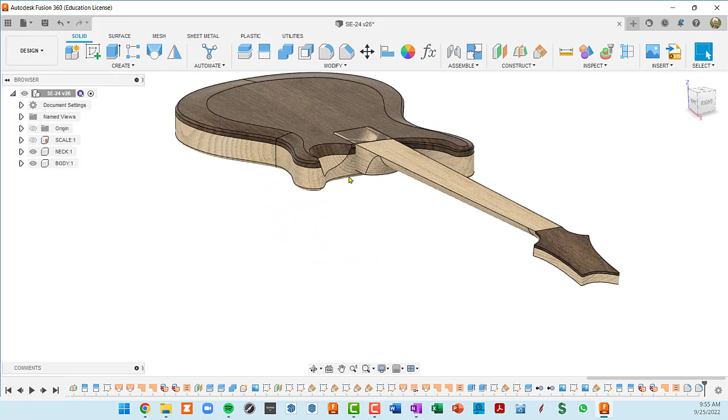In the previous video we did these body cuts, this neck access cut here, and our belly cut on the bottom side. So the final cut in the body will be where the neck joins the body. But before doing so, I noticed one thing on my guitar: the neck is slightly raised above the top of the body, and it's also slightly pitched downhill. So I want to go ahead and do those two fixes before we cut this neck joint.

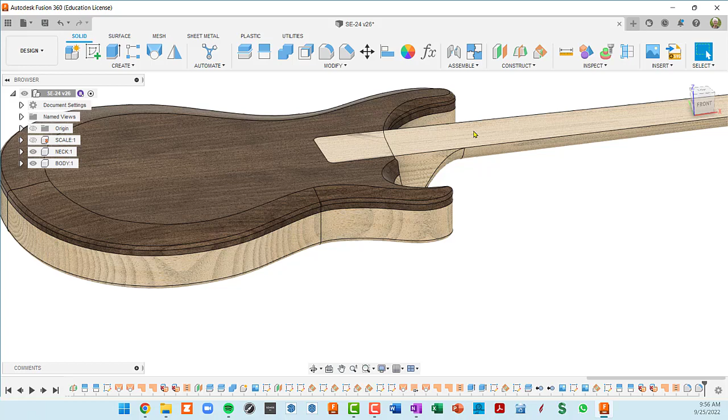The other thing is, since we're going to be angling this neck, and I put the scale in its own component, unless I do the same rotation on that scale, it's not going to be in the same plane as the neck. So I think I'm also going to project the scale onto the neck before we do the rotation. Let's go ahead and do that first.

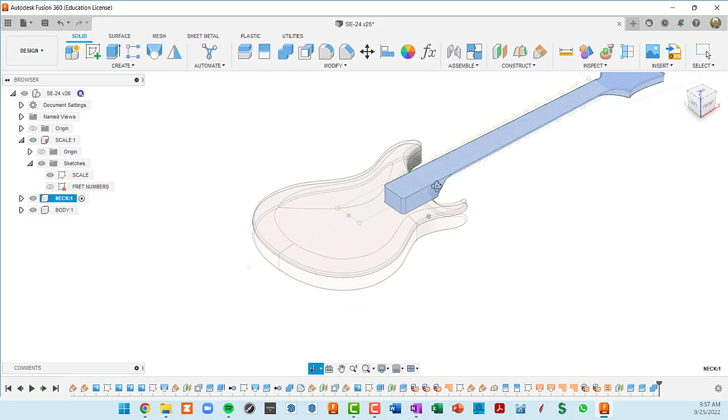I'm going to go to the scale component and make those sketches visible. Basically I want the scale sketch visible. Now I'm going to activate my neck and create a sketch on the top of the neck. So I'll go to create sketch, click on the top of the neck, and now I want to project all of these fret markers, fret lines, into that sketch.

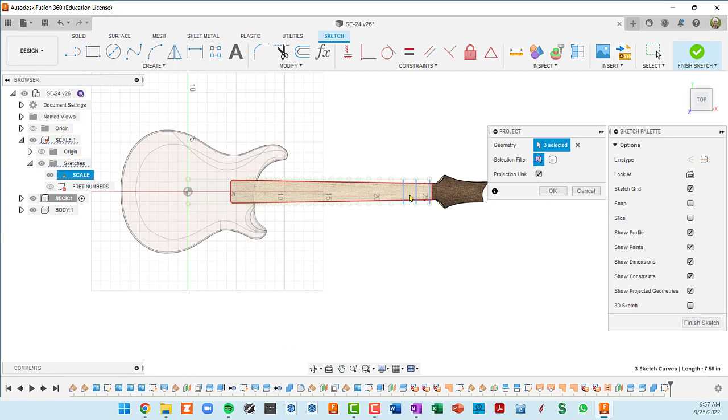So I'll hit P for project, and I'll start clicking on those. One thing that's kind of odd in Fusion is you can't do a surround selection while you're in project. Not quite sure why that is, but that would be a convenient feature to have here. So I've got to be careful and click on all of these fret slots. Let's see if I can do it quickly. I mistakenly clicked on this, so I'm going to control click to unselect it.

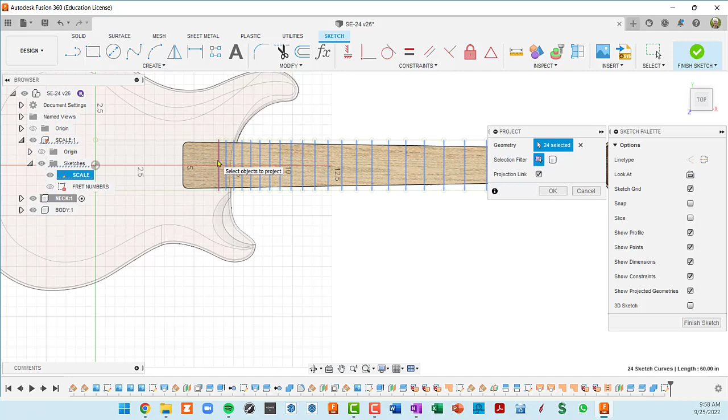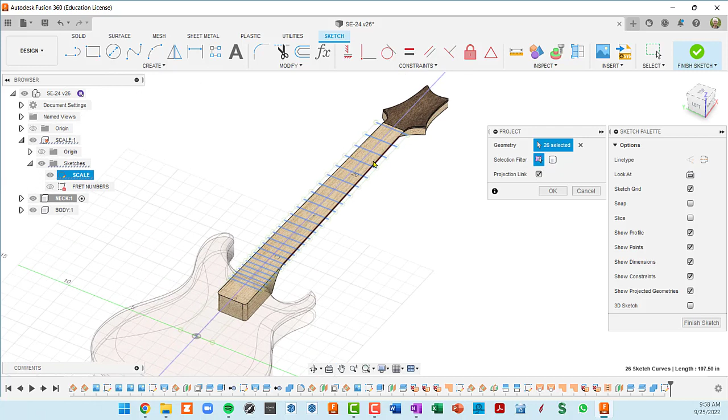Okay, so that I believe is the 24th fret, and we've also got the nut marker here. While I'm in here, I'm going to also get this center line, which may come in handy at some point. So I've got all those fret markers or fret slots selected, and I'm going to finish my project.

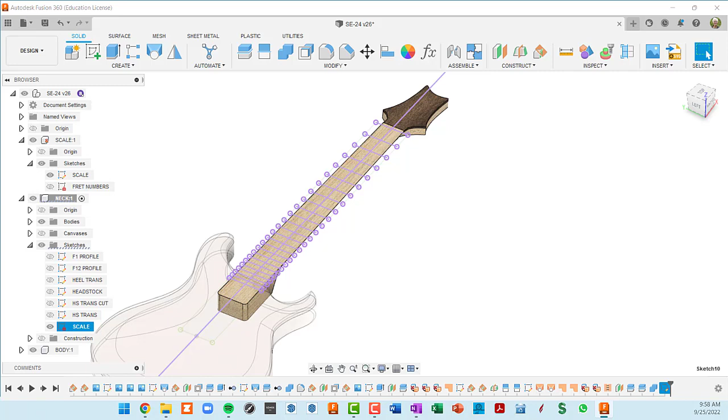Now let's open up the neck, and this is the sketch that I just created. I'm going to finish that sketch and then go ahead and name this scale. Really there's no difference between that and the scale component sketch, but when I rotate the neck, this sketch is going to come along with it.

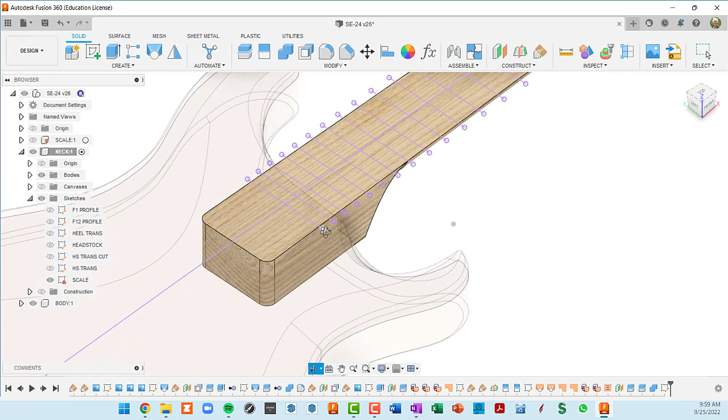I'll hide that scale, and in retrospect I would have put the scale as a sketch inside the neck next time doing this, if the neck needs to be pitched down like this does. Okay, so I want to raise this component up, and then I also want to rotate it down, and I think I want to do the rotation basically where the neck intersects the body.

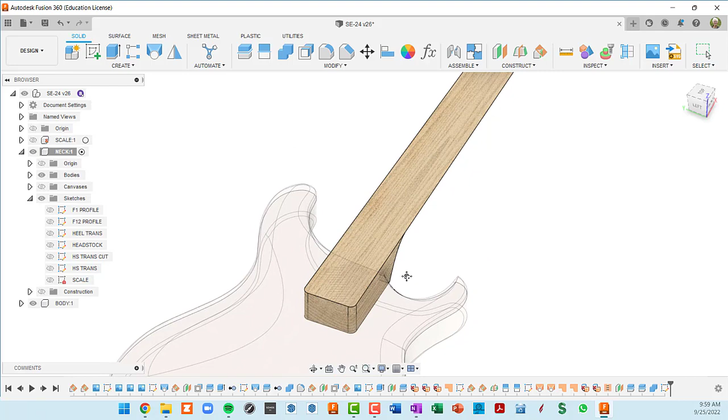I'm going to hide the scale sketch, so I need a line to do that rotation on. If we look straight at the top, we can get an outline and try to get just a horizontal line here in a sketch. So let's go ahead and start the sketch. I'll put it on the neck. Let's rotate back to where we were looking, and I'm just going to hit L for line and make sure that this is horizontal.

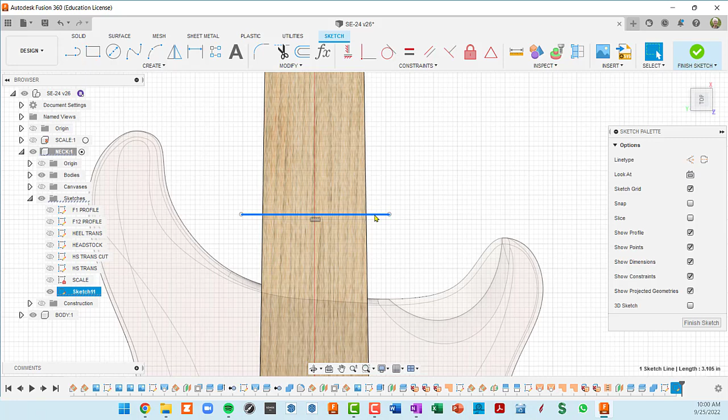I'll also make it construction just to show that we're not going to really draw or extrude anything with it. I eventually want to move this down to where the neck intersects with the body.

Let's go to the body component. Inside its sketches, there is an outline. I'm going to turn the sketches on and the outline on, and now do another project, getting this line and this line, projecting that into my sketch.

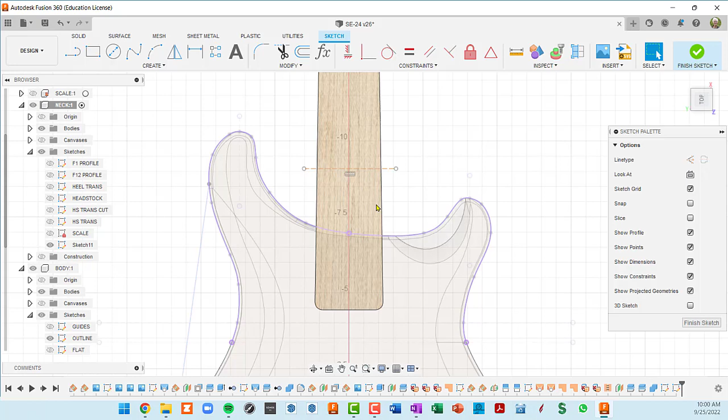Now I want to move this line down to this point. I think I'll do a midpoint, click on this line, and click on this point, and that's going to be our axis of rotation. I'll finish the sketch and name it - I'll just call this rotation axis. Let's close the body up here.

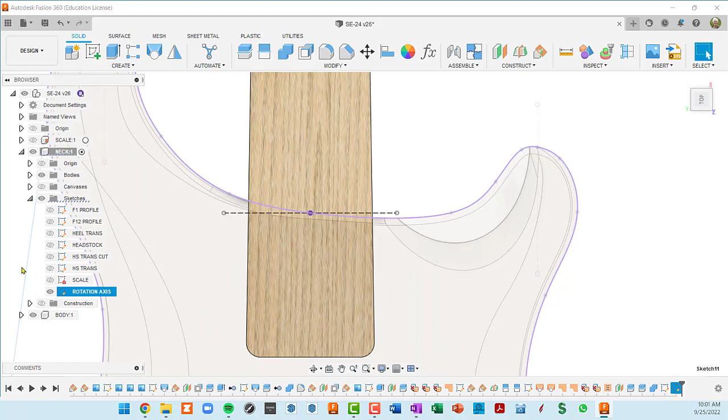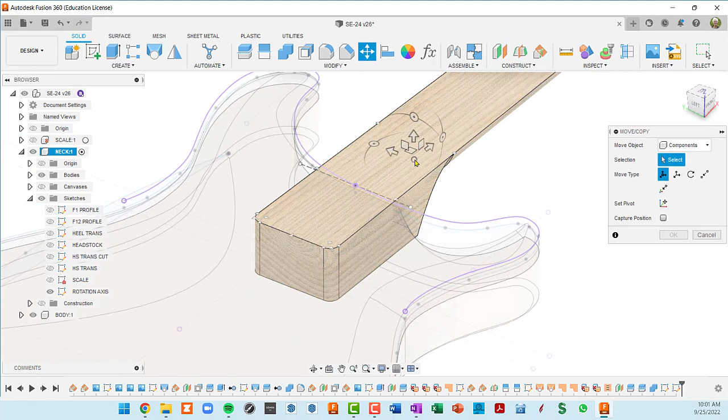Two things we want to do: we want to raise this up, I calculate about a 1/16 of an inch, and then angle it down. So I'm going to do M for move and select components. The cool thing now is I have this triad I can position somewhere, and that's handy because it'll allow us to do the axis of rotation right here.

So I'm snapping to that point, and then I'll just do my rotation - negative 0.7, 7/10 of a degree, so it's really not much.

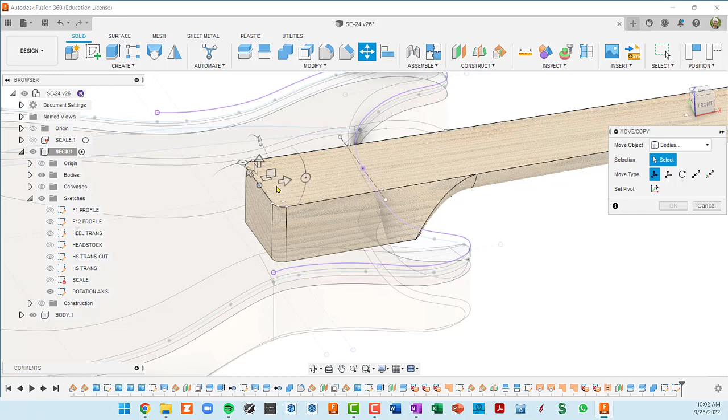Then we'll do a second move operation. I'll press M again, we'll select this body. In this case it doesn't matter where we do it from, but let's go ahead and do it from the same point. We don't want bodies, we want components here.

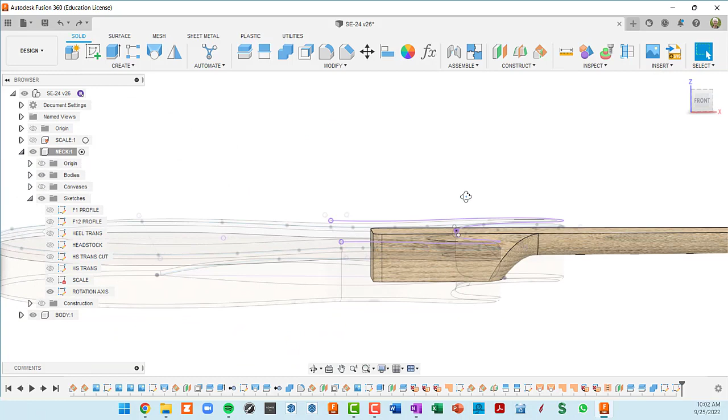Actually, I think I kind of screwed myself here, because if I move this up now, I'll be moving on that slight angle. So I'm going to undo back to where we just have the axis drawn, before the rotation. Let me make sure we're at that point.

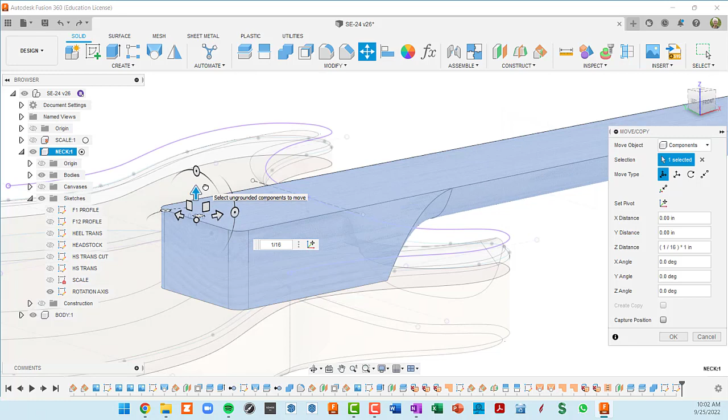Okay, so I'm going to go back to move, select components, select our body, our neck component, and move this straight up and type in 1/16. Let's look at it from the side and make sure I moved it in the right direction - so that is slightly above our body, which is right here.

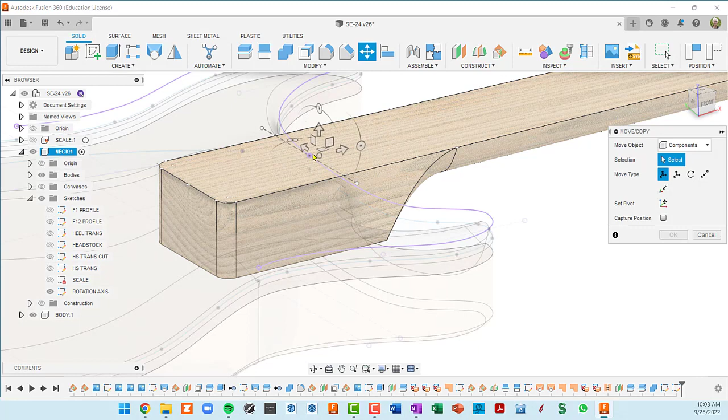Now that axis came along with us, but that's fine, so we're going to rotate from this point. M, and now we put our triad right on that center point and rotate it up minus 0.75 degrees.

Now we've done the modification to the position on the neck. You can see up here in our toolbar, I can capture that position - that's going to finalize this move. This would revert it back to its original state, so I'm going to finalize that.

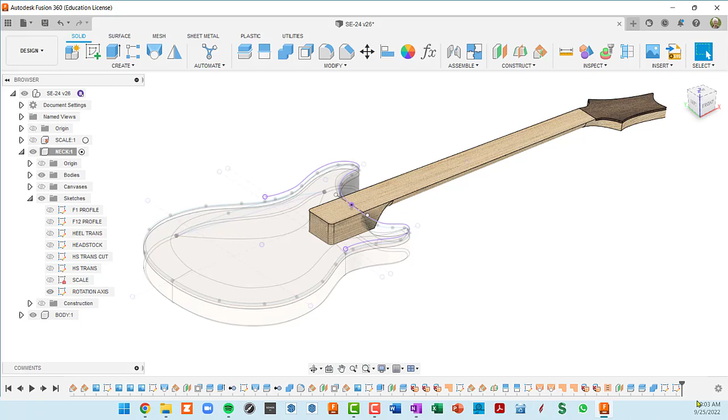You notice there's nothing in the timeline here. When you move components around, it's going to be in the main timeline - so here is the actual capture of that move.

One thing I did notice: if I right-click on this and want to edit it, I really can't edit it, there's nothing here to edit. So unfortunately, if you change the angle or distance of the neck above the body in the future, you're going to have to delete this move and do another one. You can rewind the timeline back to this position and successfully edit the move of the neck, but you won't be able to just edit the feature the way you can in most features. That's kind of unfortunate, but that's the way it is.

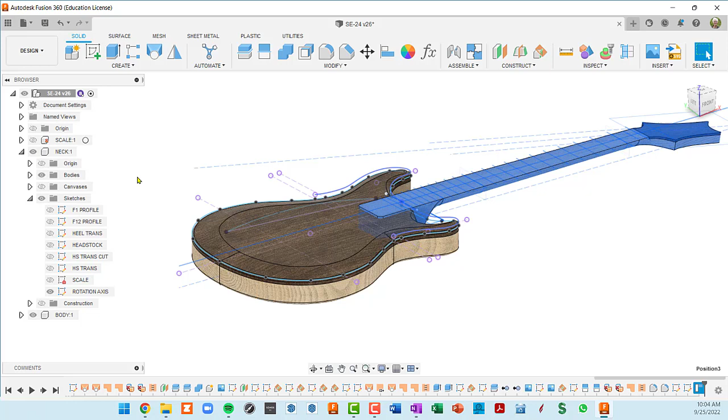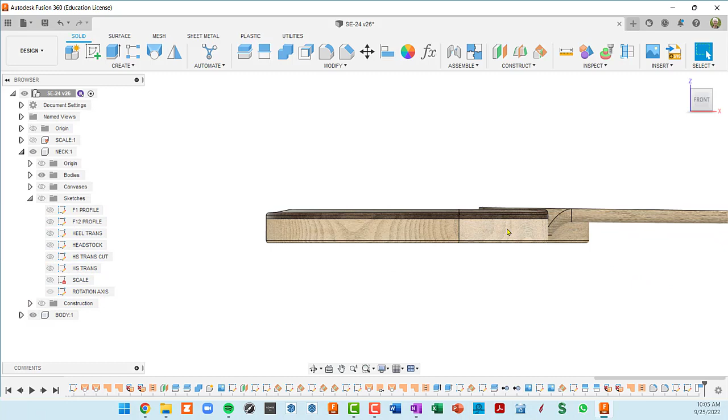Let's take a look at this. I'm going to hide all the sketches here, and we have some body sketches on too, so I'll hide those. If we look at this from the side, you can see the neck does protrude above the body and it is at a slight angle - that's what we wanted before proceeding here.

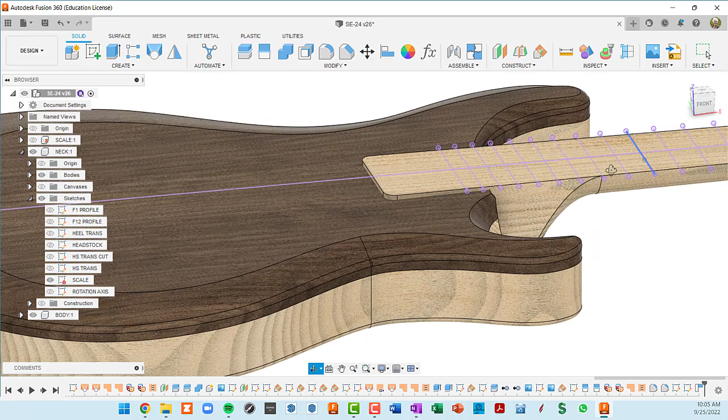Now we should have a scale. Let's turn on our neck sketches - we have a scale that also rotated and translated with us, so that's still at the top of the neck, even though the neck's not in its initial position anymore.

Next I want to actually cut away part of the top of the neck, because this is also a pickup cavity right here. So I'm going to push that down 7/8 of an inch so that we have clearance for pickups.

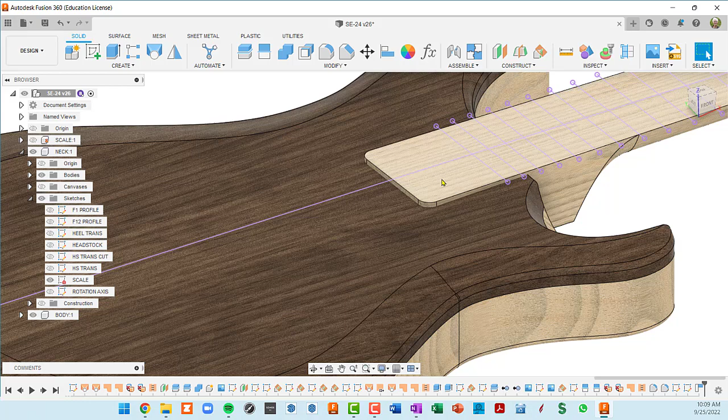Okay, so in order to do that, I need a line to be able to do an extrusion here. I figured out on my guitar, from this 24th fret, there's a 1/4 inch of fretboard, and after that this neck gets cut away for the pickup. So I need a sketch to do that. Make sure we're in the neck component, so the sketch gets located in there, and we want the scale on because we want that 24th fret right there.

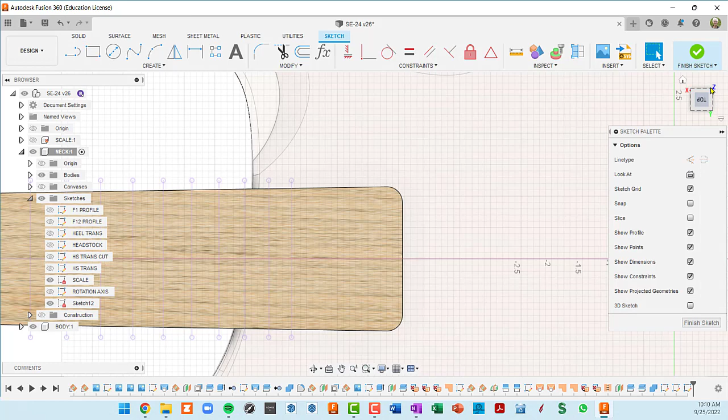So I'm going to create a sketch, click on the top of the neck. Let's rotate it up here. Well, we can't, because we're not quite at a flat plane here. So we'll work in this direction.

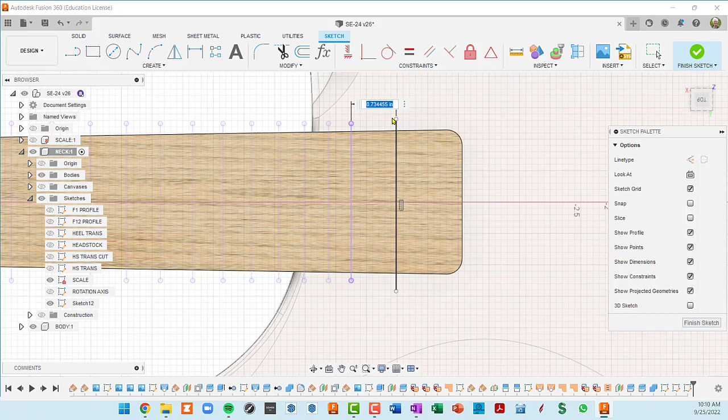So I'll hit L for line, and I want a vertical line here. Then I'm going to press escape and press D for dimension and click on the 24th fret and the new line and type in 0.25. So that's a 1/4 of an inch.

And now we still can't extrude here. So what we need to do is project to get these edges in the sketch that we have. So I hit P for project, and I'm just going to click on the top of the neck, so I'm going to get all that neck geometry.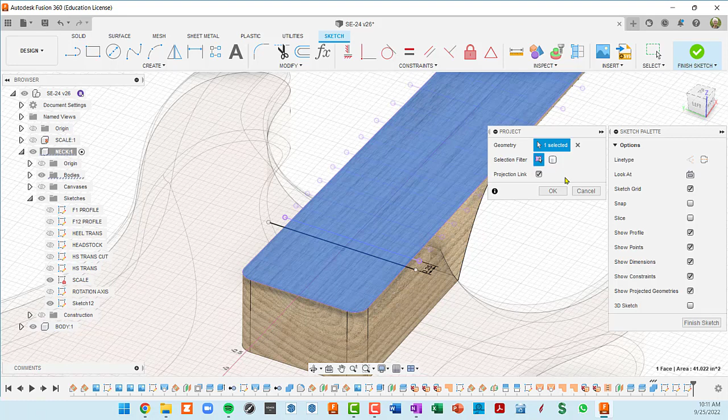And now you can see as I hover over this, I can select this face right here, and then we're going to extrude that downward. I'm going to hit E for extrude and click on the surface and push it down.

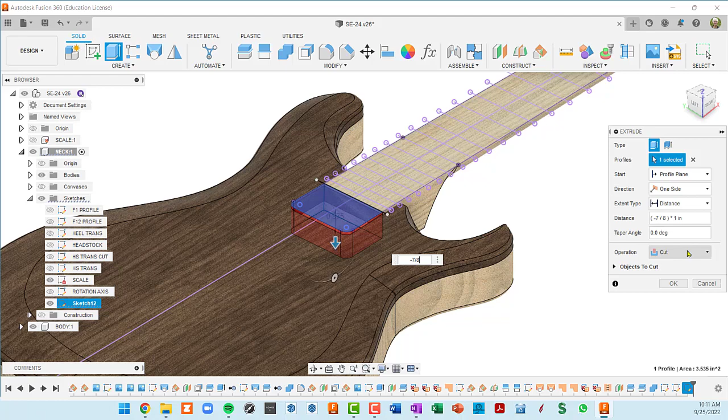And Fusion figures out that this is probably a cut, so it set this to cut. I'm just going to type in, keeping the minus, 7/8 of an inch. That pushes that down, essentially making the start of a pickup cavity. So that's what the neck really looks like inside there.

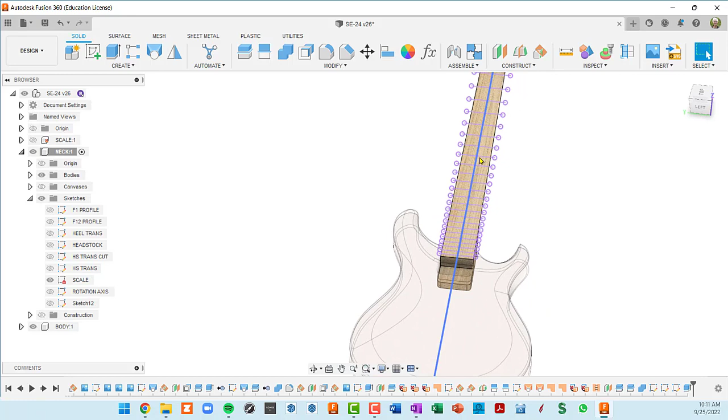All right, so next up, we're going to do the truss rod slot. Okay, so I think we do still want our center line here.

First off, let's name this sketch. So we'll call this pickup cut.

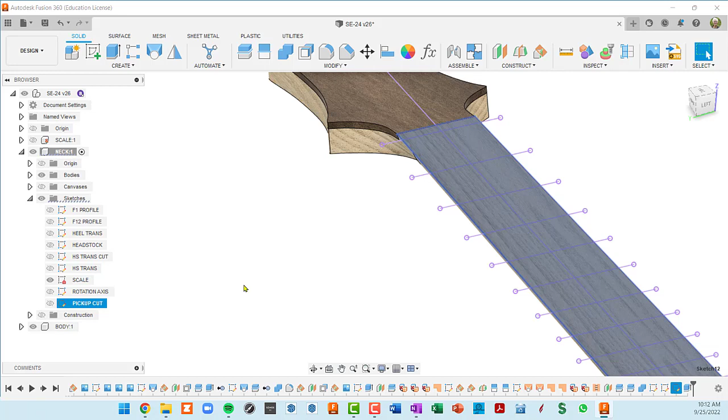All right, and now let's make a sketch for the truss rod and extrude that. So let's see where we stand here. All right, so we'll make a new sketch, again on top of the neck. And now we're going to do our geometry here.

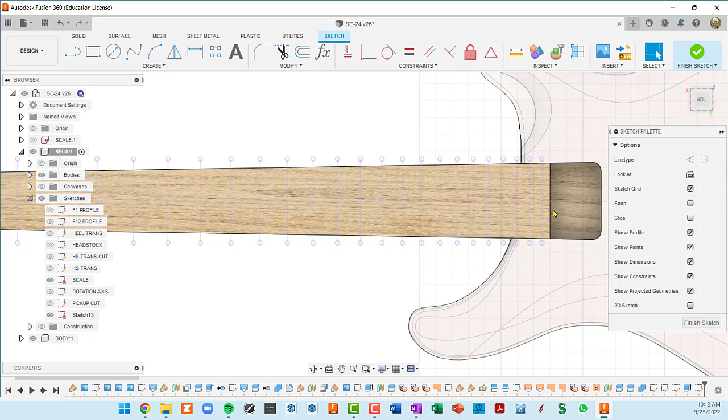So I looked up on StewMac's site and found a truss rod that I want to use, which is an 18-inch that's got a 1/4 inch Allen end to it. So now it's a matter of figuring out where to put it, and kind of messing around with this physically.

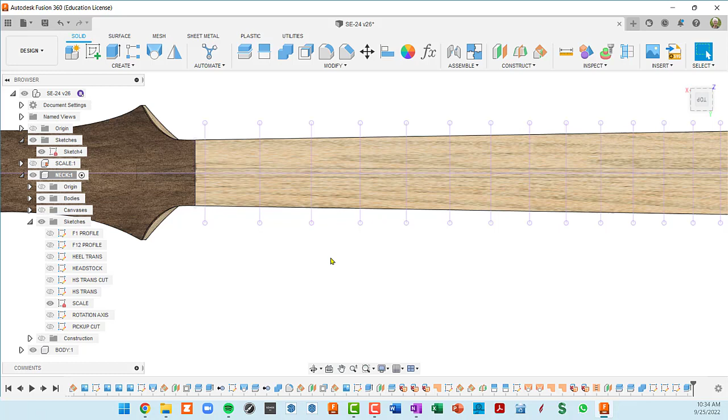I came up with, I'm going to have 17.5 inches inside the neck proper, and then a 1/2 inch sticking out into the headstock. So I'm going to create a sketch, and I'm going to put it on top of this neck and basically get a profile that we can extrude to create our slot for the truss rod.

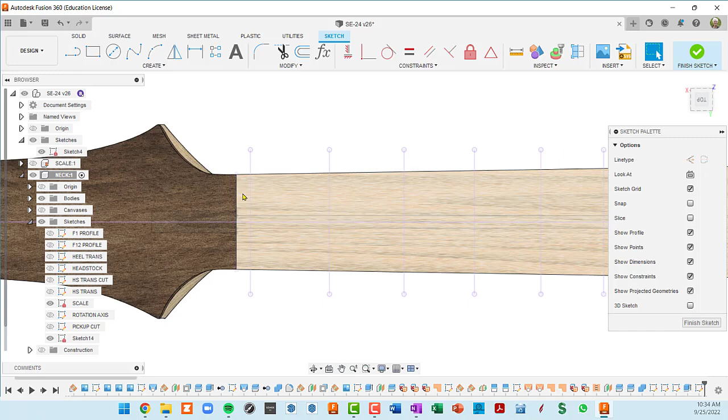So I'm going to go up to create sketch, click on the top of the neck, and first off, I want to start my line right here at the headstock neck transition point. So if I hit L, I've got nothing to snap to there, so I have to project in that line.

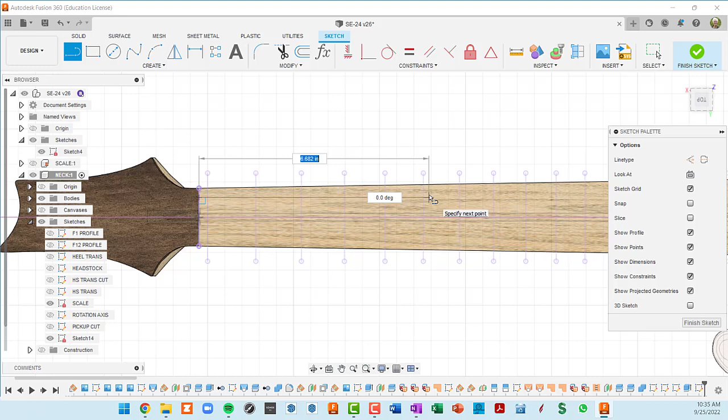So I'm going to hit P for project, select that line, and do an OK. And now if I hit L for line, I indeed can intersect with it. So I'm just going to start with a 0-degree line here, horizontal line, and type in 17.5 for its length.

And I'm going to click on the line, do a Control-C and a Control-V. So I made a copy of the line, and then I'm just going to move it vertically so it continues to intersect this transition point here, and do an OK.

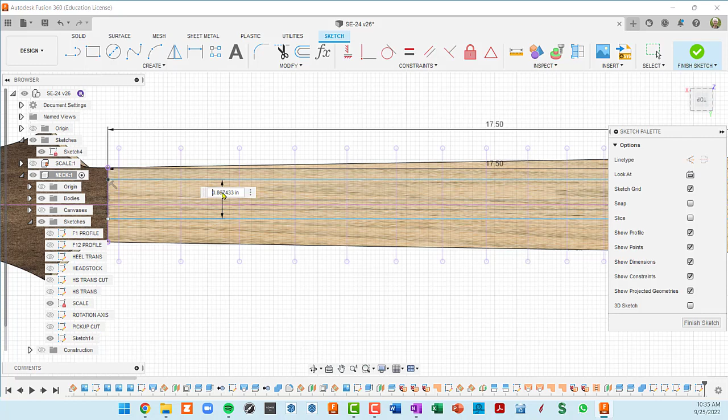Okay, so we have two lines which are going to be our truss rod slot. If I hit D for dimension and click on those two lines, I can click again and put in the width of that, which is 7/32. Okay, so here's our slot, but it is not centered on the center line.

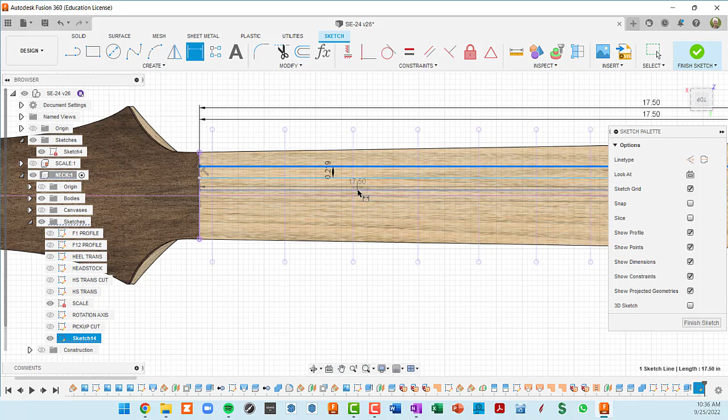So one trick I use here is to do a dimension from one of these lines to the center line, and then click, and instead of typing in a number, I'm going to go to the slot width and divide that by 2. So I just clicked on that other dimension, and now I have a formula which is half of that dimension. So that's centered both lines.

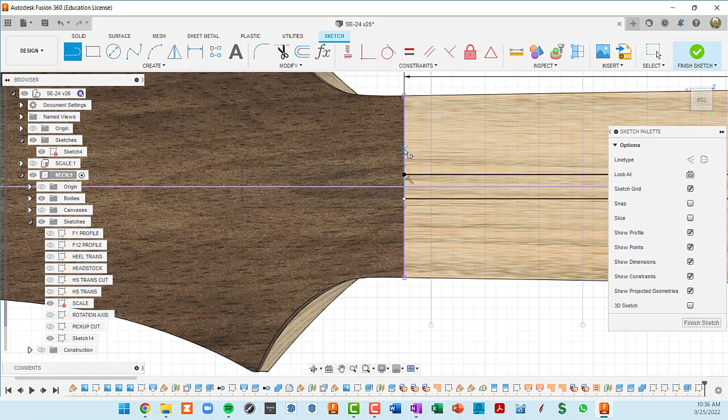Okay, so now we want to also do a slot that is a little bit wider in the headstock area to give enough clearance to put an Allen wrench in there. So same thing, I'm going to start on this transition line, and make sure I'm at the horizontal line, and this distance is going to be 1.5, and move this dimension up here. So I'll click on this, do the same thing, Control C, Control V, copy the other side down.

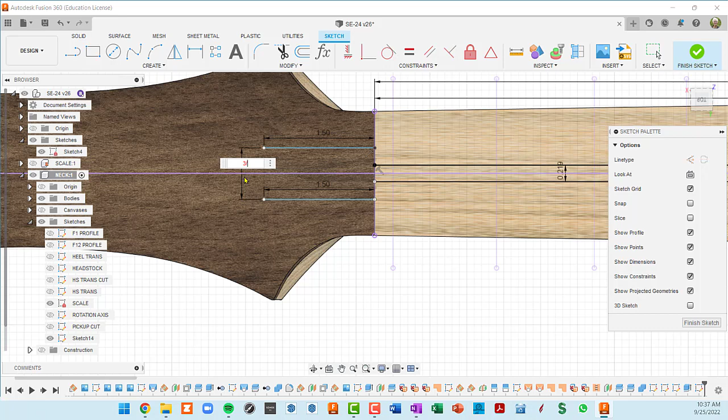And then set a distance between the two. And this distance is going to be 3/16. No, let's make that 3/8. 3/16 was, well, I don't know what 3/16 was. All right, we'll make that 3/8. Okay, and we'll do the same centering trick.

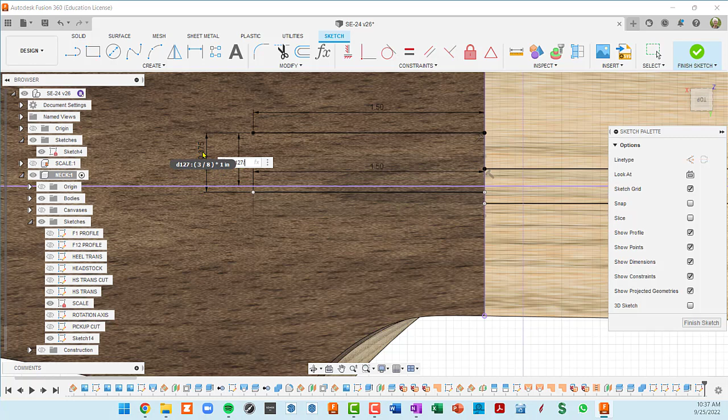So D for dimension, from here to the center line, click, and I'm going to click on this 3/8 dimension, and then divide that by 2. Okay, so both lines are centered there. And then I'm going to do a final line that connects these points here. So I can select this profile, and down on that side I also did that. So I think we can be done with the sketch now.

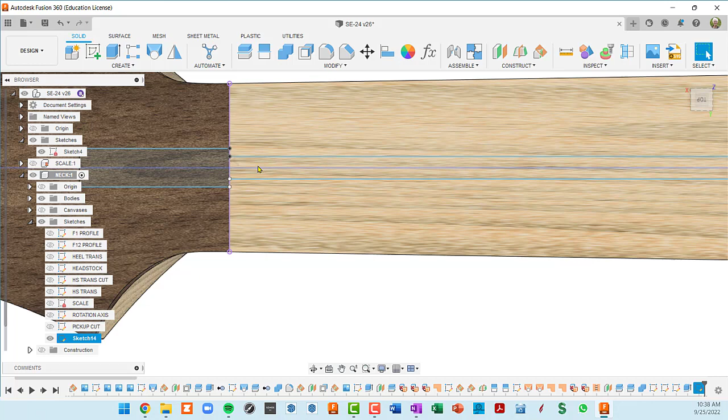And we can actually hide the scale. And now, let's see, when we hover here, we did have in our sketch a projected center line. Let's see if we delete it now, what happens. Okay, I'm not sure what happened when I deleted that.

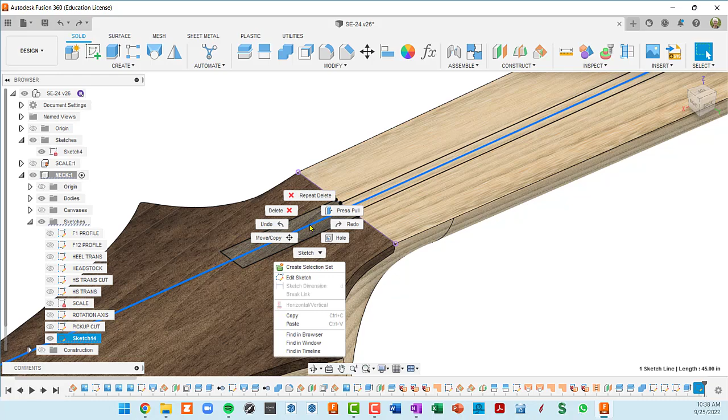So my point here is that we're going to have to do 4 selections for this extrude, because this is not a construction line. It got projected in from another sketch, so I don't believe this can be changed to a construction line, but we can give it one shot. Let's right click and edit the sketch, and let's see, everything else is hidden. So I'm going to click on that projected line, hit X, and it is not changing to construction geometry. So unfortunately we're going to have to do multiple selects.

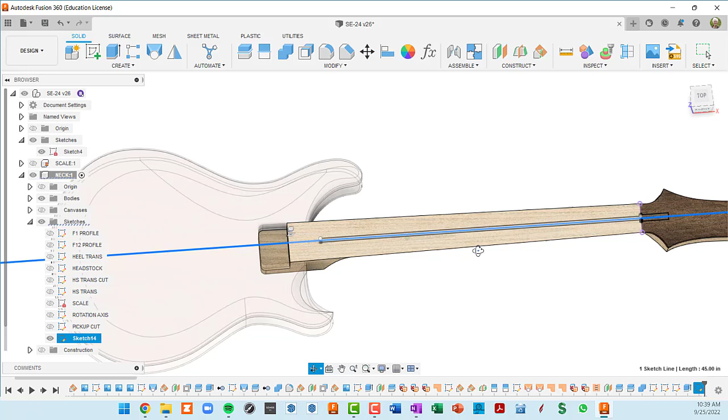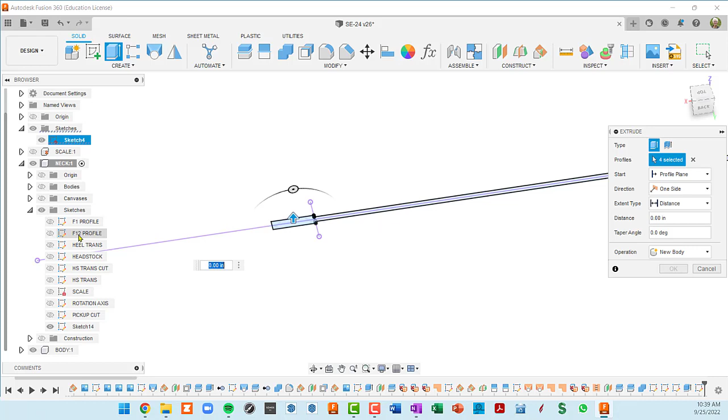All right, so I'll stop babbling here, and I'll actually cut this truss rod slot. So E for extrude, and we're going to select our profile. So here's one, there's a second one here, and then the 2 sides here. So if I hide the bodies, you can see that a little bit better. There's our selected profile. All right, let's turn the bodies back on, because we're actually going to be cutting those.

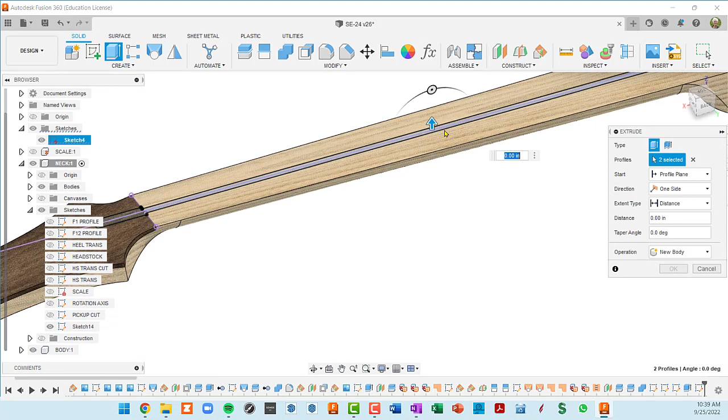And the depth we want to go to, actually there's 2 different depths here. So I'm going to unselect everything. I'm going to select just the slot over the neck, so 2 selections there, and I'm going to push this downward, and I think Fusion's going to figure out that this is going to be a cut. Yep, it changed it to cut.

All right, and this depth is going to be 7/16. So in the distance here, I keep the negative and put in 7/16. Okay, so that slot is cut.

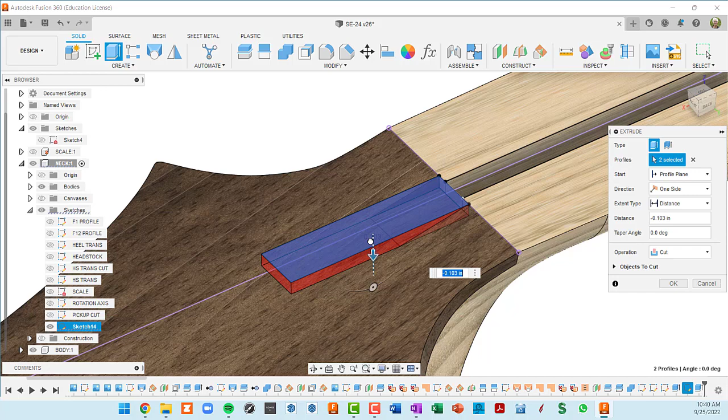Now we want to cut this slot. So I'm going to do another extrude. Type in E, pick these two sides and push this down, and this is going to be a 1/2 inch deep, so minus 0.5. Okay, all right, so there is the truss rod slot, including a bigger slot that's in the headstock.